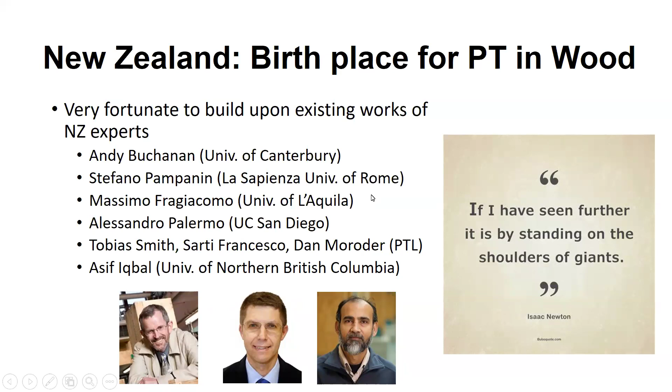But why resilience, right? It was based on a lot of existing work done by New Zealand experts, including Andy Buchanan. There's more that I haven't listed here - Alessandro, Massimo, Stefano. A lot of people working at PTL. But why are we looking at resilience?

When I'm presenting somewhere else, I say, oh, this is Christchurch, but everybody knows here, I think so. The Christchurch earthquake - with modern technology, especially Google Street View, you can actually do a before and after shot of the earthquake.

So you notice something, right? This is one of the street corners, that by Hagley Park, I don't know. You see another thing, and this is another view of how the face of the city has changed.

So although if you look at the casualty of the Christchurch earthquake, there was one major building collapse which accounted for most of the casualty. Other buildings, you could say, are dead because they had to be demolished, but the people came out alive. So you can view this as a contrast - a good thing that our design code is doing what it's supposed to do, keeping people safe.

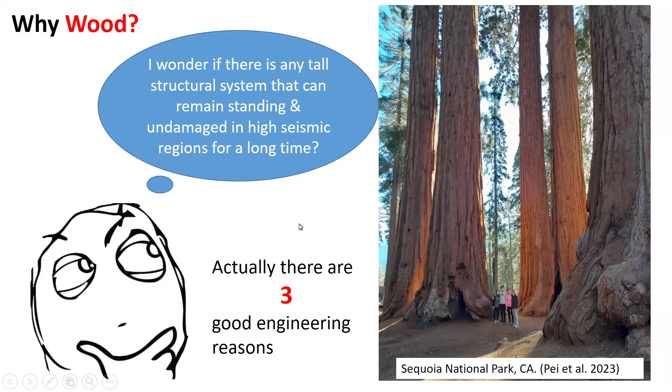But in fact, there are three good engineering reasons to do it with wood. At least in the United States, we have come a long way through analytical modeling and experimental testing. We gain more knowledge compared to when the Northridge earthquake happened. We know more about how to design wood and how it performs in earthquakes than at any time in the past, in our history.

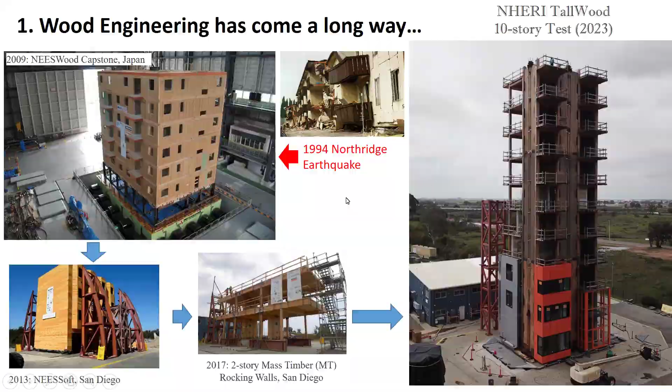Then there is the mass timber movement. I know that in New Zealand, although the timber research is actually quite ahead, the implementation of mass timber is not as prevalent as in the US.

Look at this figure - this is from last year. You already have about 2,000 projects that have been built or are under planning. And if you look at what's been built, it's over 900 right now. The US also hosts the tallest mass timber building in the world, the world record right now - the 27-story Ascent building in Milwaukee.

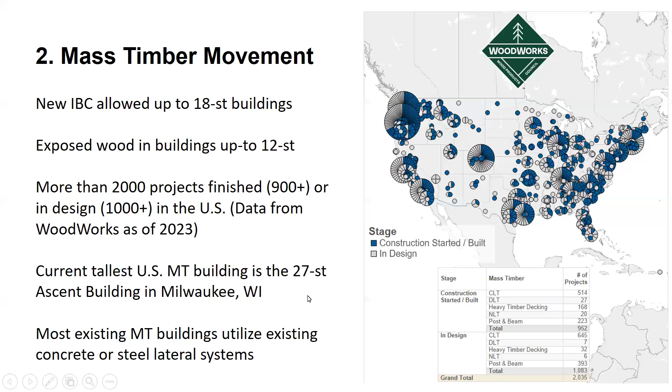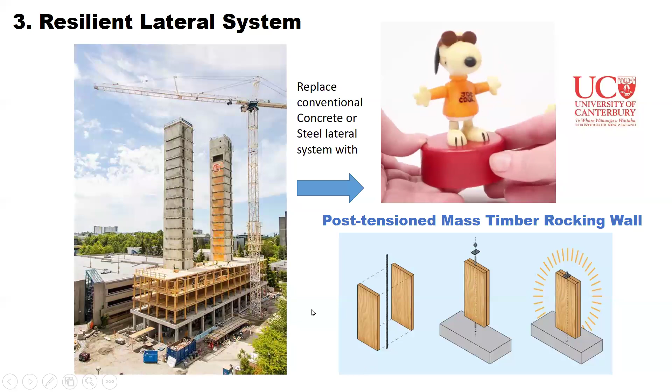So people want to see this. And then the third reason, directly connected to the work done by UC Canterbury, is that although the 2,000 buildings I showed you earlier mostly use a concrete core or steel brace frame, there's an opportunity to grab what Canterbury did - post-tension the timber system, put them in a rocking wall. I know there are two paths: one is post-tensioned frame, one is rocking wall. We choose to go with the wall, and then see how it works out.

We put everything together. In fact, even before we did the test, design engineers on the West Coast - specifically Lever Architecture and KPFF - did a fully permitted 12-story building called Framework. Some of you know that. It was not built only because of financial reasons.

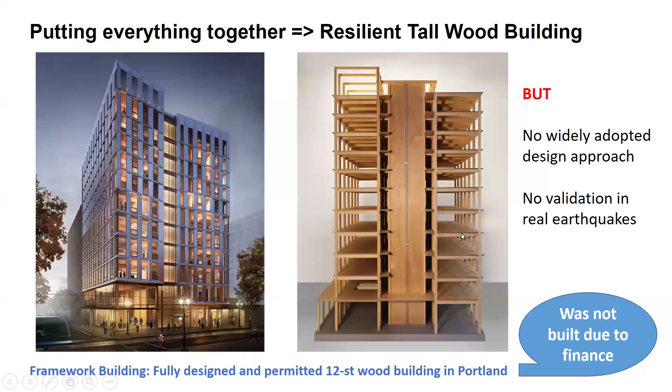I believe at the last moment the developer pulled the plug because there's an affordable housing incentive that expires, and they'd lose like $1 million if they built this, so they didn't do it. But post-tension rocking wall at this height, at this scale, has never been validated and tested in real earthquakes.

So that is the purpose of this project. Basically, we are under the umbrella of trying to find a way to build almost earthquake-proof buildings, tall wood, using mass timber rocking wall.

The project started from archetype discussion, where we look at what type of building will actually sell in the U.S. market. It turns out to be gravity framing plus some sort of core. So we did some small tests. Some of you might have seen me present this 2-story building a couple of years ago. Then today we're going to talk about the 10-story.

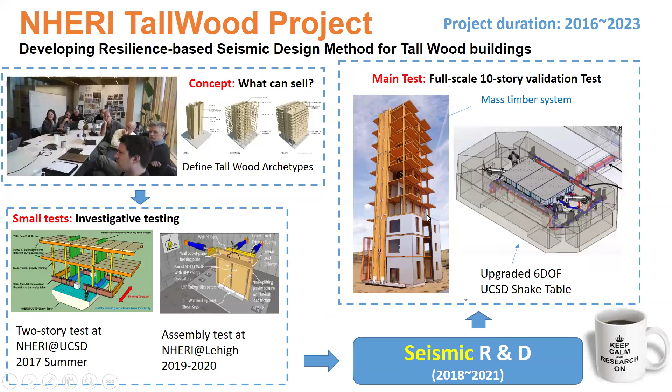The building is built based on above code. The U.S. current code is similar to New Zealand, but we're going to go for above code.

We look at no damage to structural system under design level earthquakes, repairable damage under MCE, but there should not be any residual drift. For the non-structural system, that's a little bit looser - you can get damaged. So that is what we're shooting for. Just a spoiler alert: later we found out that those performance targets, even set this high, were actually exceeded.

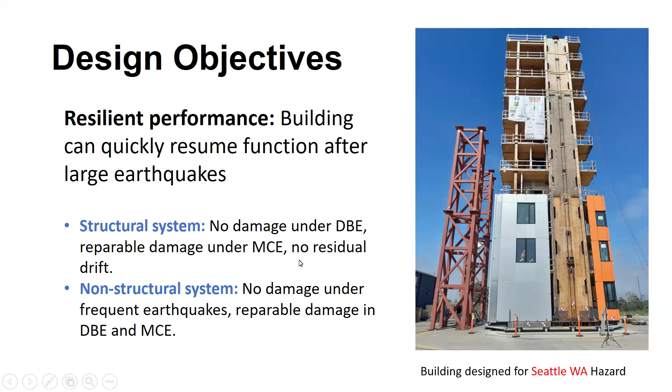So the building itself, if you look at the plan view, we're limited by the shake table - the shake table is the yellow here. So we have to put our gravity system on the shake table. Then to increase the floor size, we actually extend it out with patios.

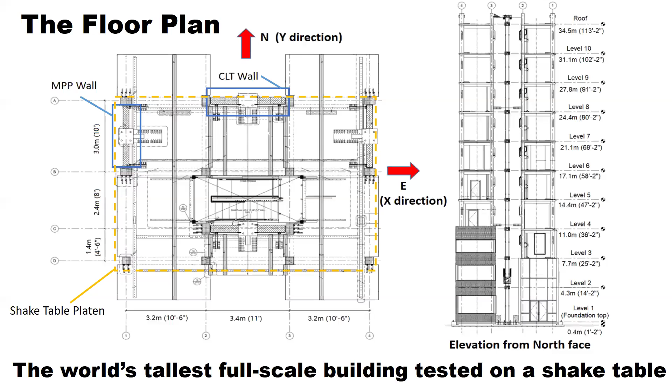There's two pairs of rocking walls. On the X direction, we have the CLT rocking wall, and in the Y direction, we have the MPP mass plywood rocking wall. The elevation of the building reveals that it is a total of about 35 meters. It is the world's tallest full-scale building ever tested on a shake table.

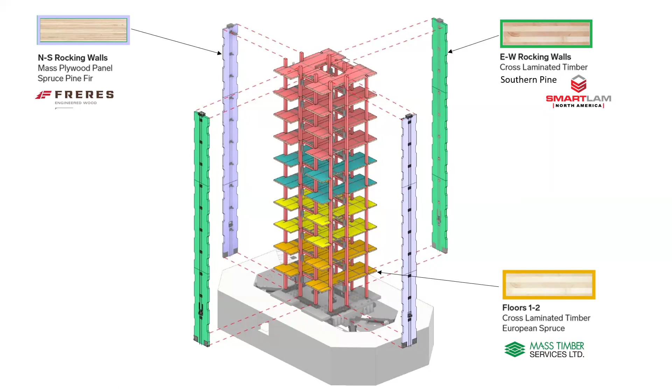For building material, I had to look for donations everywhere. So Freres gave us the rocking wall on the Y direction, SmartLam provided the rocking wall on the X direction. Then the floors came from everywhere - we got the floor from Europe, from Mass Timber Services, a Canadian company, CLT, GLT, then NLT and DLT from StructureCraft.

And finally, there's a new product from Boise Cascade called veneer laminated timber, which is basically plywood on steroids. They not only did all the top 4 floors, they also used their LVL - we did all the columns and beams because glulam is expensive and donation is really hard to find. But yeah, Boise Cascade's LVLs are great.

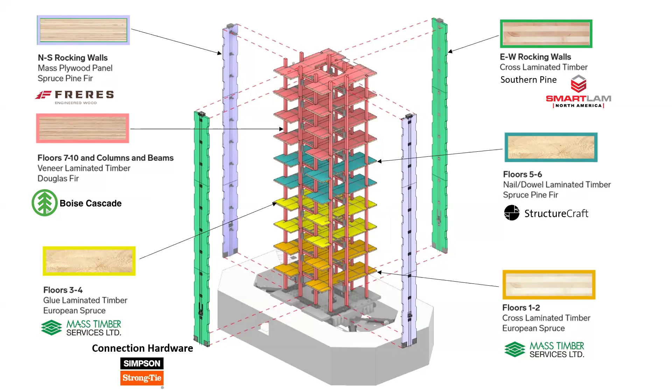Then of course, our old friend Simpson Strong Tie did all the hardware.

The rocking wall itself, as you can see in this picture, comes in 3 panels. Why? Because it is very hard to ship, if not even impossible to ship, a 110-foot tall long panel, or 35-meter panel. So they came in 3 pieces. We put them together, connect them in the middle, and then it's a rigid connection, so the entire wall is one piece - a 1-panel rocking wall with a 35-meter steel PT threaded rod.

The system is actually quite simple.

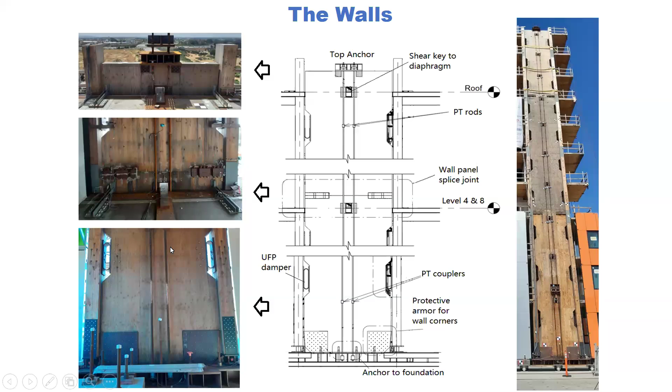The construction of the building itself, the gravity system, is apparently just like any typical construction. You get a stair tower where we got donation from a modular stair tower company, Construction Specialties, and Timberlab and Swinerton did the construction - the most exciting part is actually trying to stitch the wall panels together in mid-air. The construction took about 5 months, but there was one and a half months we were waiting for parts. You're like, okay, waiting for what part?

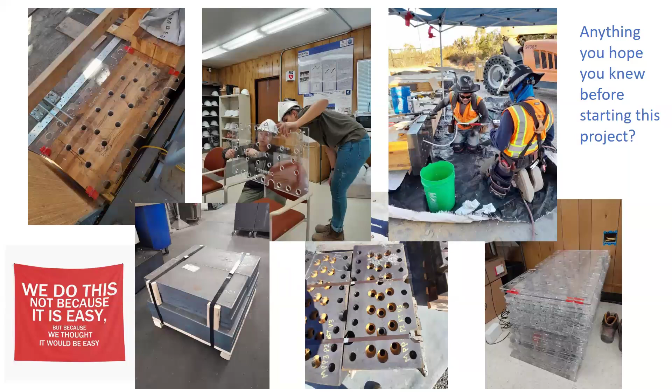Okay, well, let me tell you a story. I wish I could tell you that everything went great, there were no hiccups, everything just perfect. No, this is probably one of the biggest challenges during the construction.

The walls are connected with epoxy rods, which means you drill the wall on this side and on the other side, then the holes should match. Then you put a steel threaded rod in there, and inject epoxy. But the issue comes when the fabricator - another fabricator, not Timberlab - Timberlab did a perfect job, but we outsourced this part of fabrication to another fabricator. They did hand fabrication, and the holes didn't match up.

Then what are the solutions? Because the panels are donated, I can't get another panel. So we had to actually fabricate steel couplers - steel plates that are 4 inches thick. 4 inches, what is that? It's like 100 millimeters.

We have to drill the holes. Although those two panels look the same, everything is actually mapped to the real as-built wood, and then we drill each one individually. That plastic piece is what we use to capture the hole location and put it into a computer model, then send it to the shops for CNC and everything.

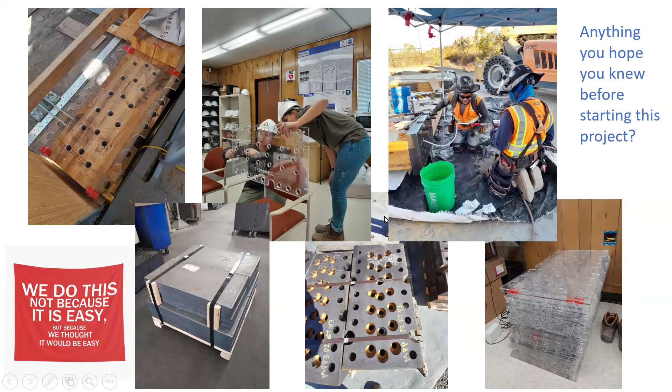This coupler allows you to still use epoxy rods, but you can epoxy the coupler onto the wall on each side, and then bolt it on the other side. So, like I said, 1.5 months and $200,000 later, you got this connection, which actually works perfect because if you plan it ahead, this is actually a valid connection detail. You can do it in normal life and it probably won't cost that much if you plan it ahead.

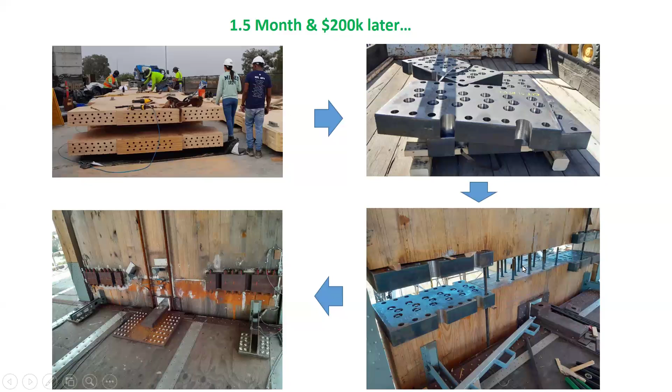We also tested the epoxy rod connection because, force-wise, it is epoxy rods. You can also see some center shear rods. We didn't do that with the coupler because those are short. The tension rods are much longer, and for the shorter rods used for shear, we just enlarged the holes.

So this gives you a good picture of the size of the building, and this is towards the end of structural construction. That is actually the final roof panel. In fact, you don't see it here, but we actually have everybody's signature on the back side of it. So once that's put on, the structural system is complete.

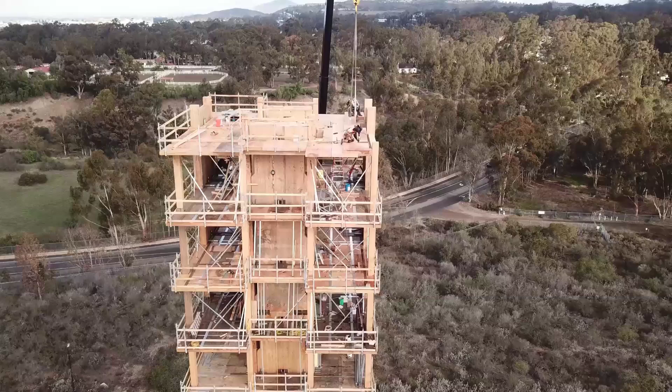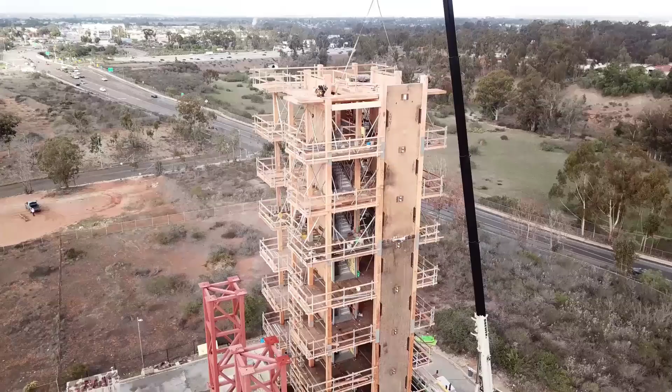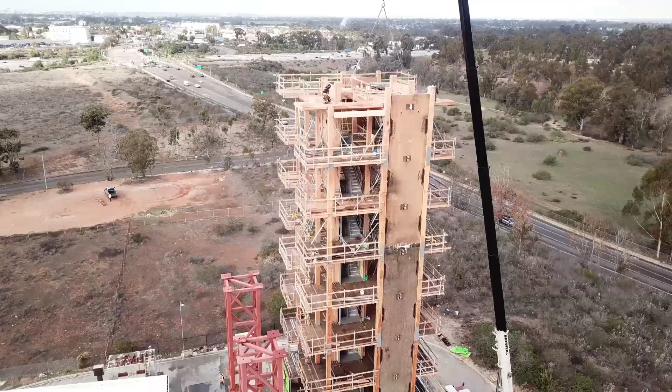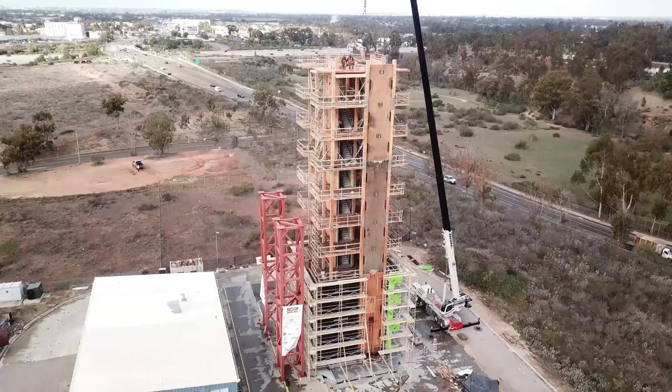If you've ever been to San Diego, maybe you recognize the area. This is the Miramar Air Force Base area, kind of on the outskirts of San Diego, and you can see the ocean on the other side, and the cities. The red towers you see here are the safety towers for the shake table facility. Those are put in just in case you want to test something like a 6-story or 5-story building and it tries to collapse into the nearby building. That building is where the hydraulics are, so they don't want that.

But yeah, our building is just too high. They figured a 6-story safety tower should be enough, but I think later, testing a 10-story building will become the norm at UCSD.

That is just a non-structural system. We also are testing the non-structural system. It's important because of the resiliency of the building, we're looking at no-damage systems. It doesn't help too much if all your windows are broken and all that, so we want to test different non-structural systems.

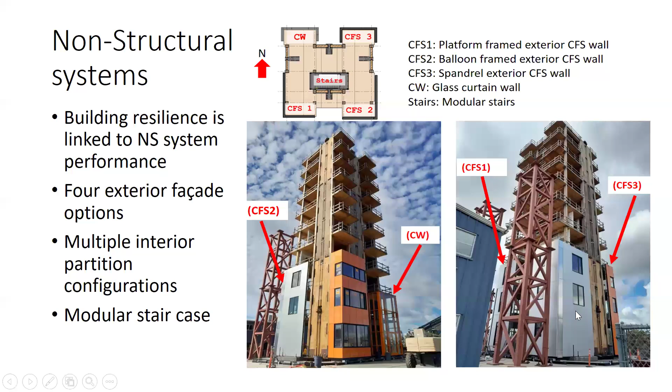On the facade side, we have 4 different facades, as you can see listed here. Most of them are light cold-formed steel, typical building facade. We have interior walls as well, and then apparently stairs. Those are some interior wall details, and then there are some stairs.

The stairs are the same. We have 10 stories, so our stair manufacturer, Construction Specialties, was able to test different systems, from a very simple system like just a slotted hole to a very elaborate system of 3D drift-compatible connections.

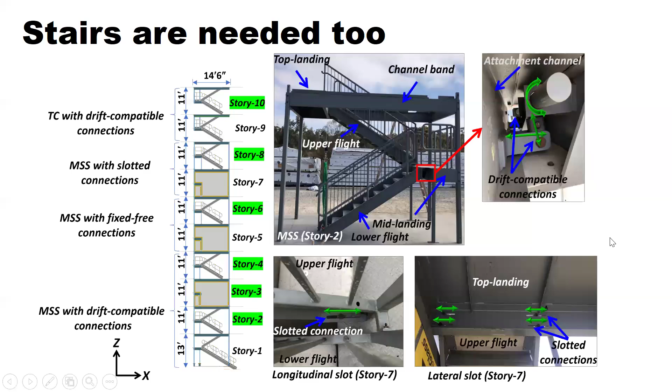The instrumentation of this building is also, I think, the first in history of a building instrumented with over 700 channels of data, with all the sensors: accelerometers, displacement gauges, load cells, strain gauges, tilt meters for rotation. Yeah, it's a lot of work. It took us about 3 months to get it all ready.

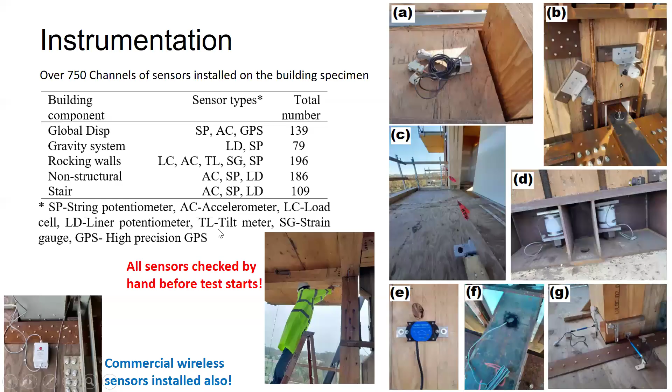And when everything gets installed, you need to get it plugged into the data acquisition system on site, which has about 750 capacity—we almost used all of it. A lot of people ask why you don't use wireless. For a dynamic test where time syncing is critical, and you have such a density of sensors with a lot of interference from steel and the building, wired is still the only reliable way to do it.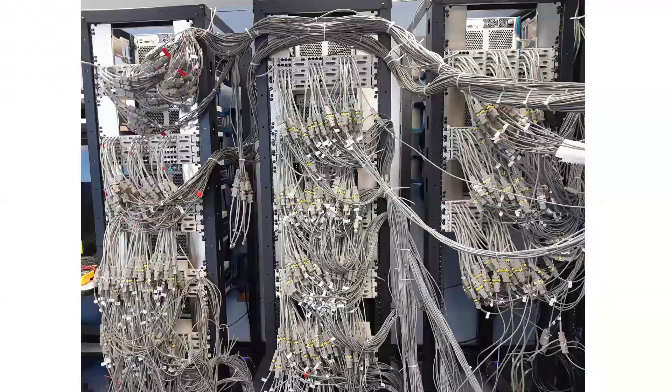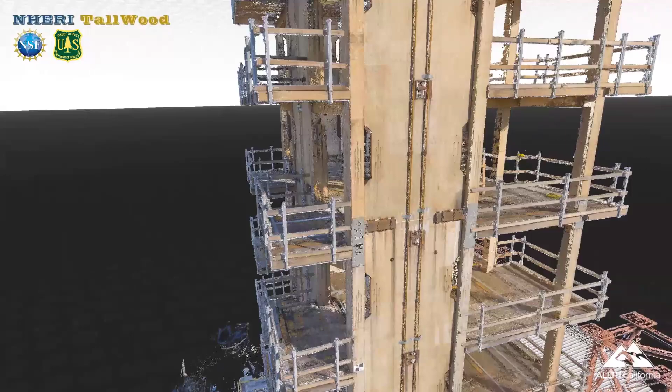So we also did some pretty cool LiDAR, point cloud work. There's a group at UC San Diego that has drones and LiDAR. They came in and did a data preservation of the building before we tested it, and after we tested, they have point cloud models.

So the building apparently now is all gone, deconstructed. But if I want to know if I really punched that nail in that connection, I can go back to the point cloud model and see it. Not that I want to, but now a lot of people ask, okay, are you going to collapse it?

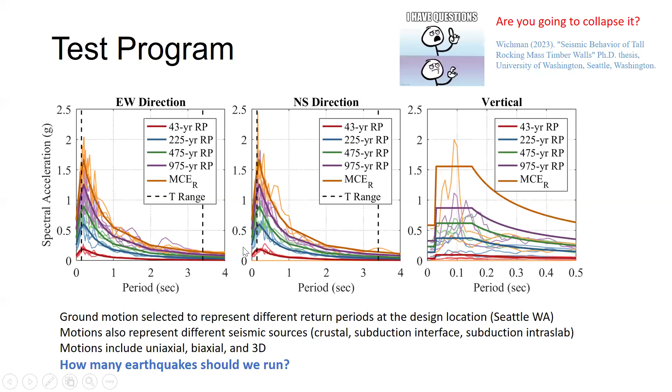No, the answer is apparently no. First of all, the UCSD site, they will not allow us to do it. Second, this building was designed for a specific location, actually in downtown Seattle. And we want to test not just the building, but the design methodology, so we want to test it to the design hazard levels. Then the question is how many tests you're going to run.

Initially I was thinking we're gonna run about 20 tests, because I've done 2-story tests before, and that one we ran 14. But as we actually started testing this thing, it blew our expectations. It just won't get damaged. So we said, okay, well, we can collect more data. So we just kept running.

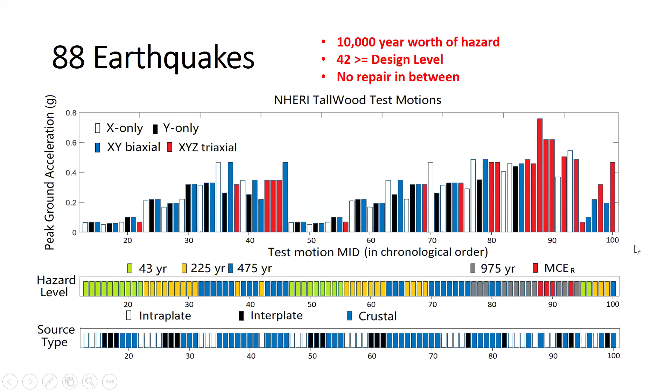In phase 1, we ran 88 earthquakes. About half of it is at or beyond the design level earthquakes. There was no repair in between, and we even ran 3 MCE earthquakes without any repair. You can see the different directions we ran, the PGA, and hazard level, as well as the source type, because in Seattle you could get different earthquake source types.

So without further ado, I'm just going to show you a video. This is the largest 3D shake of MCE Loma Prieta, which is scaled up. You see a drone view on top of the building, a close-up on one of the rocking walls, and the entire building.

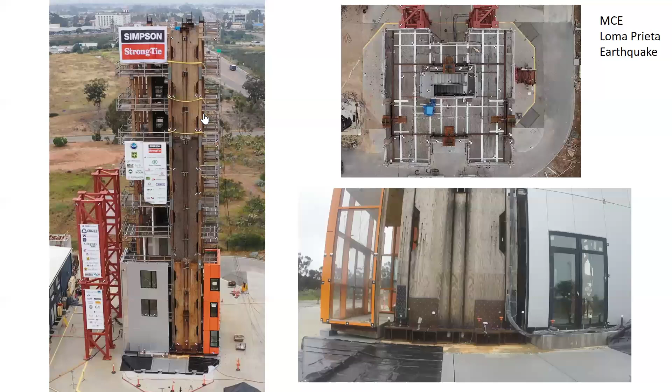Okay, I think because of the internet bandwidth you don't see them sync quite well, but you get the idea. You see a lot of higher mode effect on the tall building. The close-up, we have a lot of cameras on the inside too.

This is another earthquake, the Japanese Tohoku earthquake, which is very long, lasting 3 minutes. I'm just showing you the strong motion which lasts about 1 minute. These are from the interior wall. For this one, look at the top, that's where the sliding track is. For the stairs, look at the landing, that's a flexible joint. And for this one, that's a facade on the corner of the building, because the corner has some flexible joints to enable the corner to move.

You can see the sliding track here, on the corner. And then the joint right here.

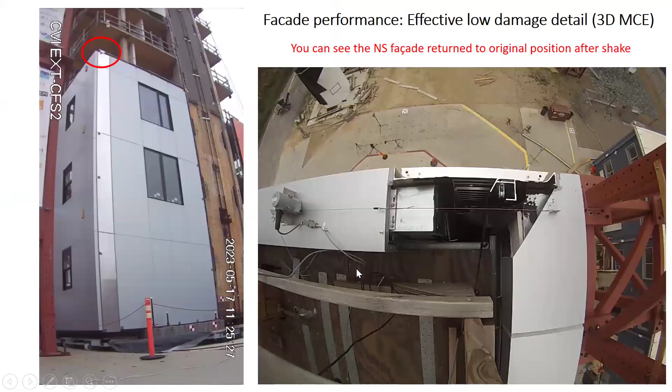What I showed you, the Tohoku earthquake, is so long that the shake table only had the capacity to run it in 1D. But what about 3D? This corner is important, we look at it in 3D. This is a 3D Loma Prieta earthquake, the one you just saw.

Now you can see it's a higher mode response where there's a lot of fast movement. Then after the end of the earthquake, you get the first mode response. Right now you can see it's a slower movement with huge deformations. But after all is said and done, remember this is 3D motion. The non-structural system will end up exactly where it started. That proves the building can recenter.

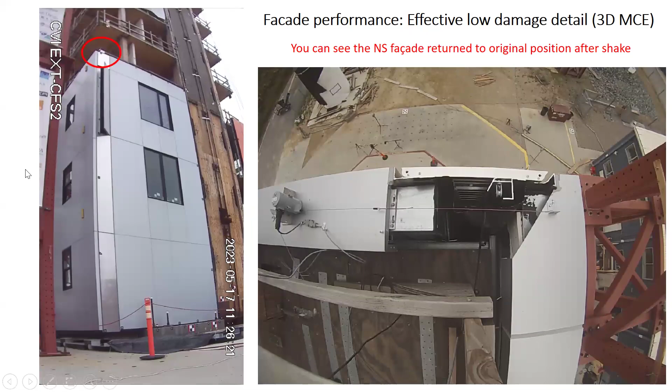So is there any damage? Yes, we see some non-structural damage, but structurally we did a very detailed inspection. There's no detectable damage. Even after a lot of tests, we pulled the rocking wall out and looked at the bottom toe, the corner of the rocking wall where it's supposed to get crushed. You only see a little bit of that.

But because there is some damage to the non-structural system, you did see the building soften up. So the natural period, if you look at its first mode, went from below 2 seconds to above 2 seconds, about 1.7 to about 2 seconds in each direction.

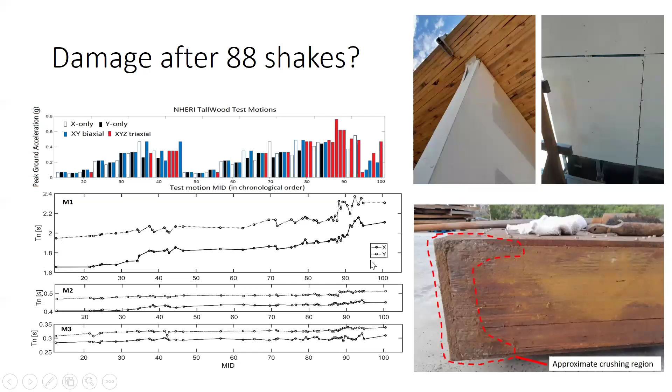Then the building overall, the performance is great. If you look at the inter-story drift, at the MCE we're about 2%, which is exactly what we predicted to be. The acceleration, you reach about 2G, but that's MCE. If you look at the design level, it's about

1.3-ish. One interesting thing, this is a clear indication of higher mode effect, is that the maximum story drift and maximum acceleration, they don't happen at the bottom of the building. And they also don't happen at the very, very top. They happen around this upper part.

Acceleration is even more interesting. The maximum acceleration happens at the middle of the building and then tip of the building. That is a classic sine wave higher mode effect.

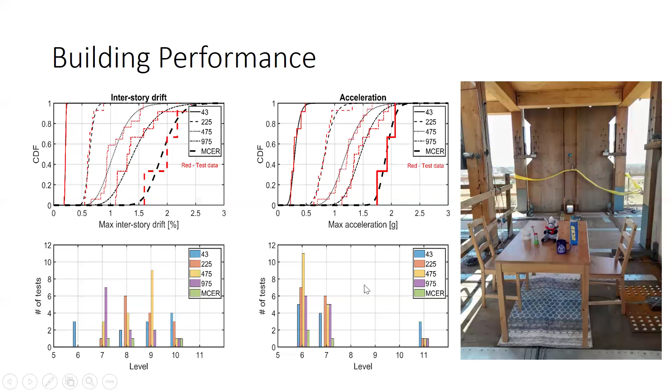This is another, I talk about the non-structural system, right? I might have to show this one. We're trying to break a window, but we can't. The reason is what you just saw.

This piece of glass is likely the heaviest piece that is on the curtain wall on the northwest side of the building. This piece of glass is a 2-hour fire-rated glass from Germany.

The glass itself is about, let me see, about half a ton, I think, 2 kips. Yeah, 2 kips, half a ton, is that right? Okay, anyway, it's about 2,000 pounds. But what happened is that the glass just racked the frame, because now modern window manufacturers, to account for thermal expansion, they have built in some flexibility between the frame and the glass, so that although not specific for seismic, it actually worked pretty well.

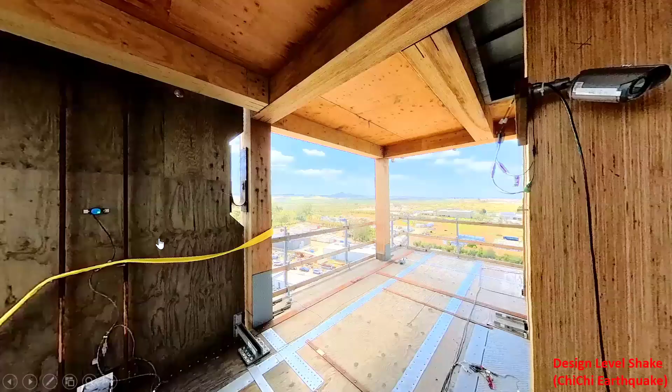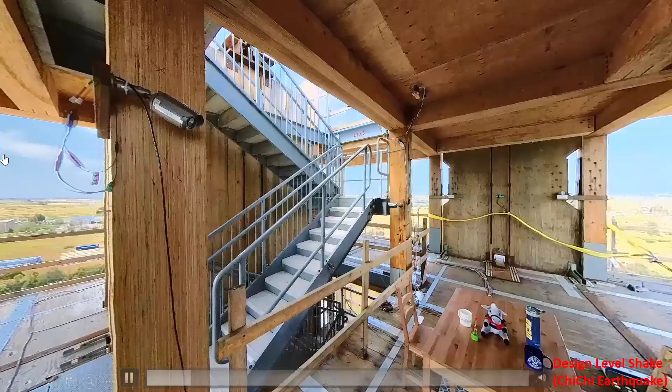This is another view for a design level earthquake to show you how it would actually feel if you're on the 10th floor of the building during a design level earthquake. This is Chichi earthquake 3D. We have our decoration there.

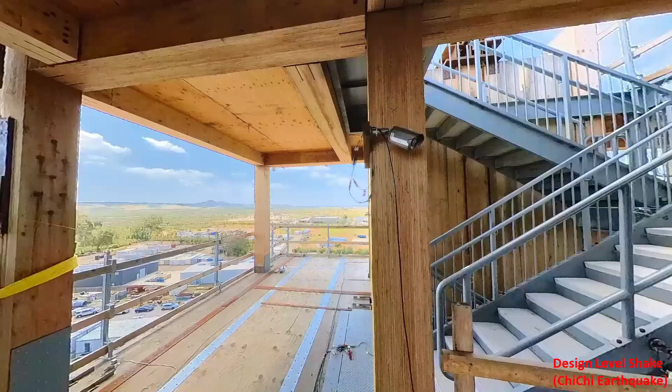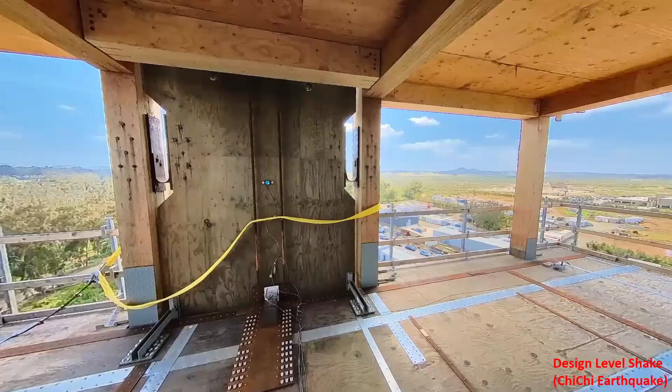Some of you might remember a test done by Professor Ario Ceccotti from Italy many years ago at E-Defense, where a rigidly built CLT building, a panelized CLT building, recorded very high acceleration on the top. But for this one, as you can see,

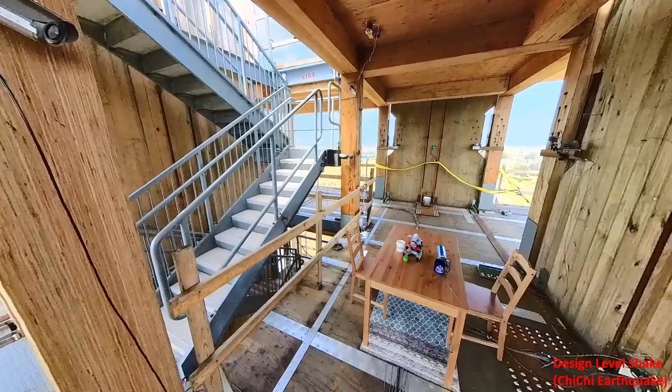you see the rocking wall moving, you see the gravity frame racking, you see the stair move around, but if you're there, your water bottle doesn't fall off. And then do you see the carpet? I intentionally put the carpet on because the carpet really ties the room together.

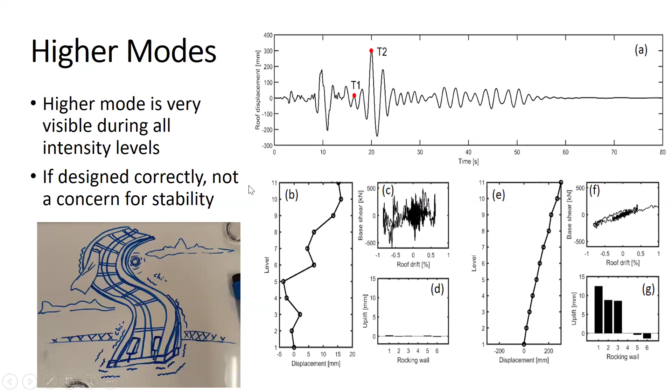But higher mode effect, I would say it's kind of a double-edged sword. You have to account for it and for overstrength. But once you take care of that, the higher mode is actually good for stability because it doesn't produce too much displacement. Then we have some very key knowledge now, truly major knowledge about what our post-tension force is.

This is normalized by the yielding. So we started with about 0.4, 40% of yielding. Then during the MCE test, it goes up to about 55%. So not much, because our rods are very long.

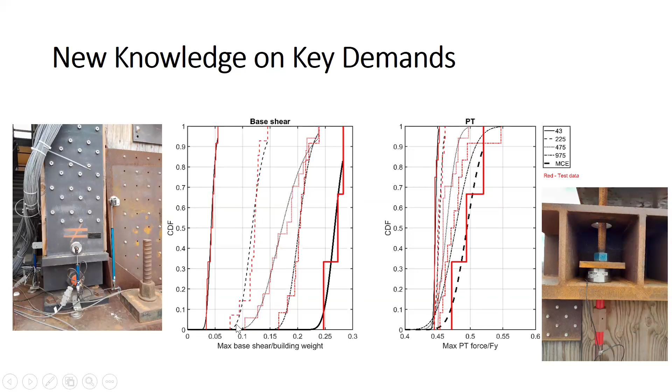Then for base shear, we normalize it with the building weight. So you can see there's, in the US it's called the CS base shear factor, less than 0.3, even for MCE. For design, it's like right here, about 0.17-ish average.

Then also, because we can test this building many times, we are able to actually look at something that we always take for granted. We design the building decoupled in each direction, although earthquake is 3D. But if you really run the same earthquake uniaxial, biaxial, and triaxial, and compare the response in one direction, does it differ that much? The answer is actually no. The displacement doesn't differ that much. The demand doesn't differ that much. So we kind of validated with the full scale test that what we've always been doing in our design is actually right. Yeah, go figure.

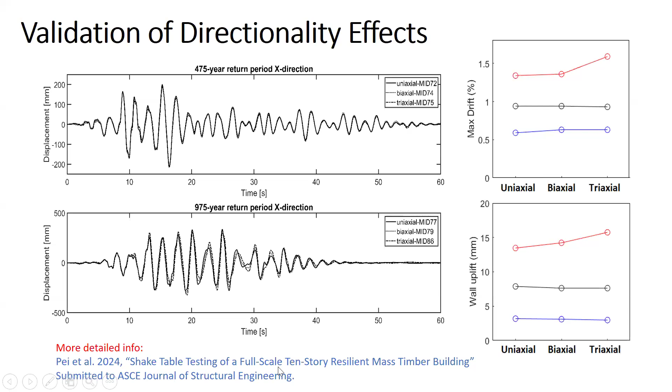After the test we just showed you, the 88 test, we did another 19 test. A researcher from MTU put dampers on one side of the wall. Then our Japanese collaborator, Sumitomo Forestry, came in and did their own wall design. They ran another 51 tests, including a lot of very large earthquakes from Japan. That paper is coming out, but right now I'm under NDA, so I can't talk too much.

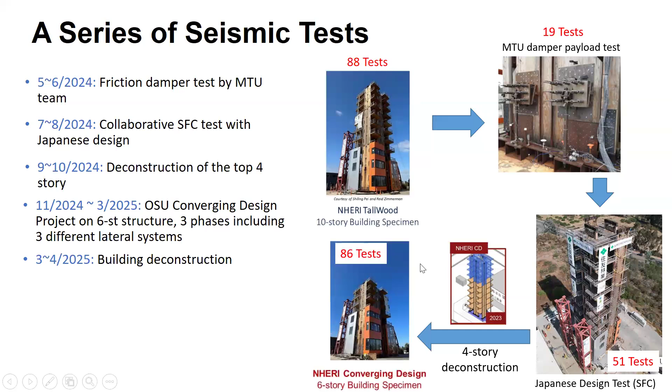Then we took the top 4 stories off, so it became the 6-story building. We handed it over to our collaborator at Oregon State University, and they did another 86 tests. If you look at the gravity system, because we switched the lateral system back and forth, the gravity system on the bottom 6-story building went through 244 earthquakes.

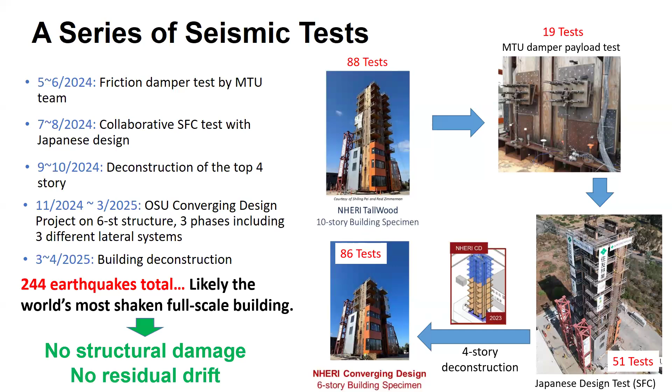It's likely the world's most shaken full-scale building, but there's no structural damage and no residual drift. Like Daniel said, I appreciate that. It is almost an earthquake-proof building.

So what is the main takeaway? The earthquake-resilient building is not only possible, but also practical, because we did it with some normal contractor on the market. There's nothing too special about it. The post-tension rocking wall, I believe, is the key, and it is replicable. You just need to be careful when you stitch panels together—it'll cost you if you don't do it right.

The gravity system designed by my collaborator at Simpson Strong-Tie is really great. I have to speak to that, because if a gravity system collapses, it doesn't matter how good your rocking wall is. Finally, the non-structural system, if you detail and design it right, can be functional and repairable even at an MCE event.

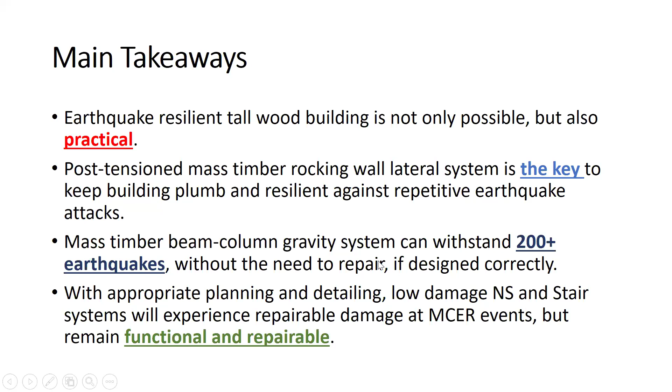Right now we are doing the codification through the FEMA P695 procedure. This was led by myself and my collaborator Reid Zimmerman, who I have to say is probably one of the top timber engineers right now in the US. We're shooting for ASCE 7. The next update cycle is 2028, but we'll have to do all our work by next year, so you'll see some reports coming out.

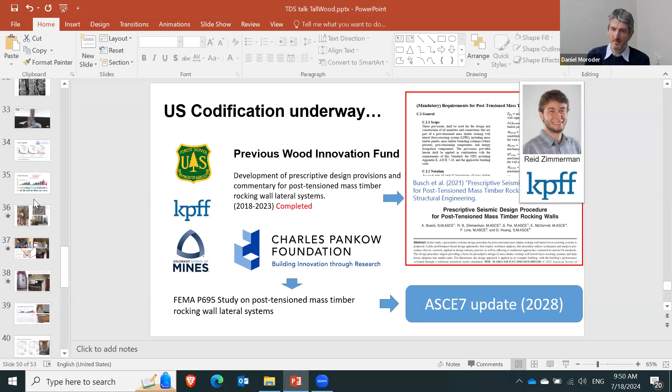And that's a really good segue, Shiling, onto the last question about the floor-to-rocking-wall connections, which always seem to be a bit of a headache in design, but in your test they don't show any significant damage or problem. I'm also curious because I worked on this during my PhD, and my conclusion was exactly what you just said: the timber is flexible enough and the connection is flexible enough to take care of it, but I'd love to hear your view based on the testing you've carried out.

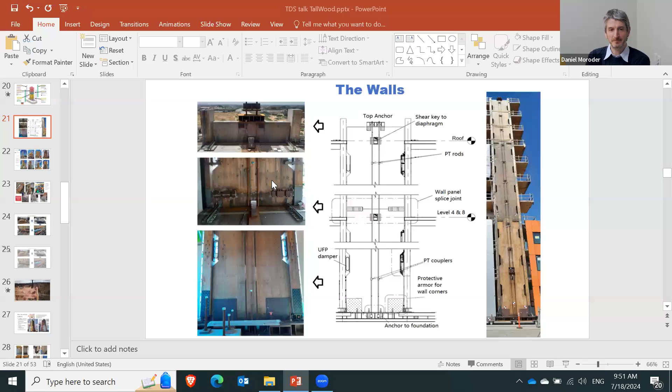Yeah, so I'm going to show you the connection, what it looked like. The connection looks like this. Basically, the walls are not connected to the diaphragm at any point except here and here. Those two don't transfer shear—they're the out-of-plane bracing. So the only shear transfer is through this mechanism, where we have collectors on the floor.

We collect all the shear and get it into this steel bar, which we call a shear key. Then we insert it into the rocking wall inside a slotted hole, where the side of the bar—you can see a little bit of white here—sits on a Teflon-type friction-free surface. Then the side of the bar is actually a little bit curved.

So when the wall rocks, your vertical motion of the wall and lateral motion with respect to the diaphragm are decoupled. So basically, the diaphragm will not be pushed up or down when the wall rocks. It'll just be dragged sideways.

I visited your office, and you guys have a different detail relying just on simple bolts based on wood flexibility. We actually were thinking about doing that because it's cheaper, apparently. But considering the amount of earthquake we have to go through, we don't want it to get any damage, so we elected to use this, what we call a slotted shear key transfer.

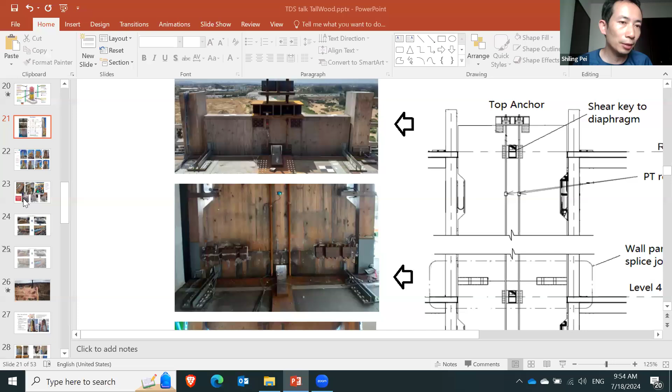Yeah, I mean, apparently through the rocking wall or floor—not through the rocking wall. The rocking wall is fixed. It's not penetrable. It's a whole entire piece.

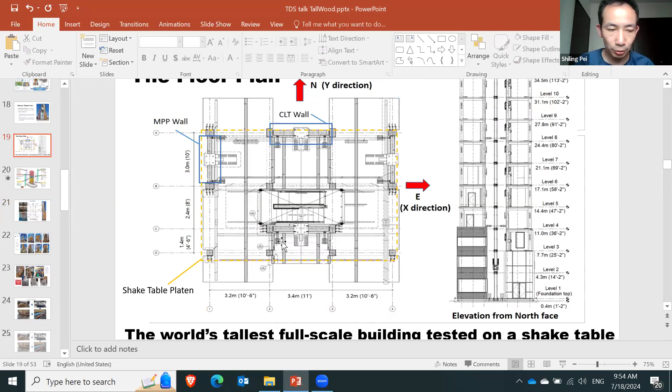The floor, you do have a penetration right here, right? And if you don't have a stairway, you could do a small penetration just around the rocking wall, which I did test 5 or 6 years ago, in a two-story test where we just penetrated the floor with a little slot, which is fine. In fact, it's even more beneficial because now you don't need that complicated bracing system—you can just brace it with a compression-only brace on both sides.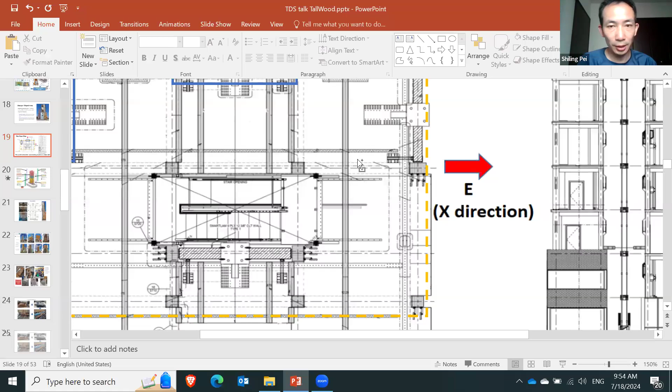In this test, because our rocking walls are all on the outside, this bracing has to take both tension and compression, so it looks a little chunky. If your walls are actually slotted in, then your bracing will be much easier and more cost effective.

Shiling, I have a last question, which is my own question. You've done all this amazing testing, shake table tests. Now, obviously, there's a bit of numerical follow-up work and design standards work. But what's next in your timber research moving forward? What's the next big project you're going to work on, if you're willing to share that with us?

I think right now I'm doing the codification, but that's actually part of this project. I need to do some traveling and try to learn from other experts around the world. Once I get back to the US, I'll start to think about my next proposal. I really want to do something that's going to impact the practice and industry.

Maybe something related to easily assembling mass timber systems on site, or maybe I'll go with wind, because in the United States there are a lot of tornadoes and hurricanes, and there's some need there. It's a tall order to come up with another idea like this in the short term, but I'll keep trying.

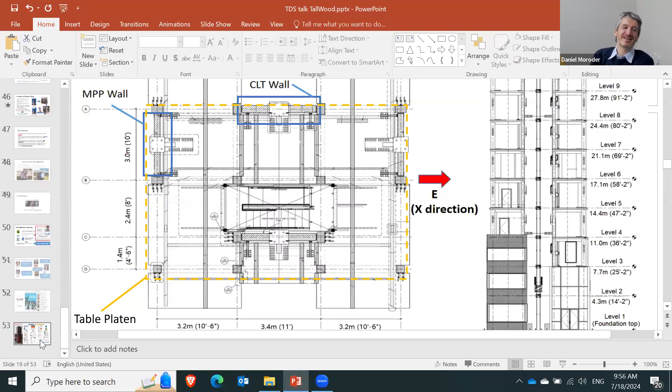I'll keep everybody posted—just follow my Twitter. Okay, follow my Twitter, I'll keep everybody posted. I'm enjoying your Twitter account, and I'm definitely looking forward to what's next. Thank you so much.